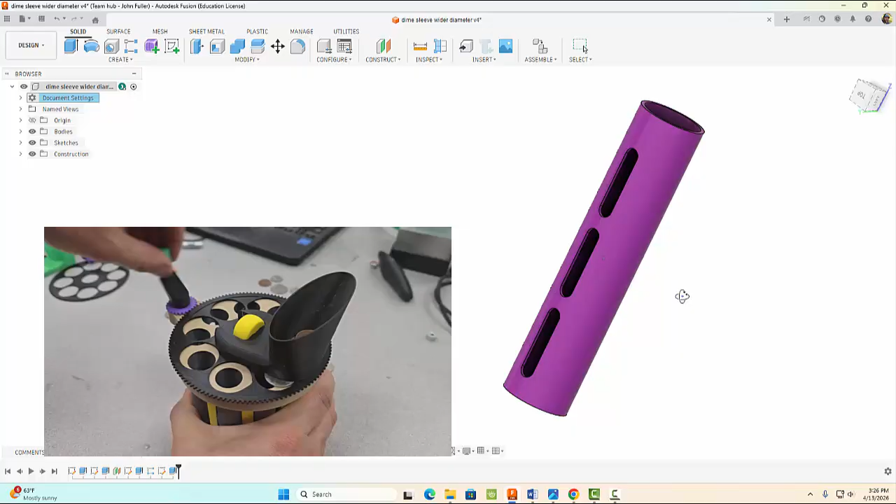Come on up to File and do a new Part Design and select Create New. The first one we're going to make is our dime coin sleeve. We're going to come on up here and create a sketch on this plane.

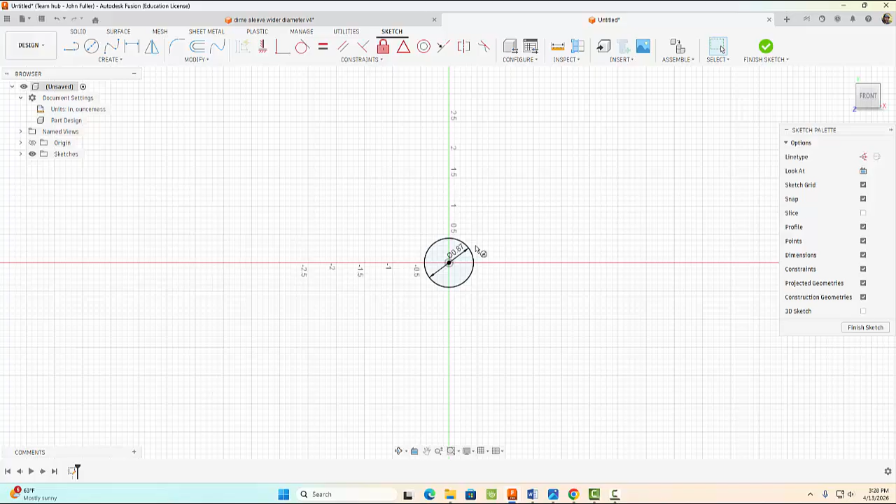Come on over to Center Circle, and we're going to drag out a circle with a diameter of 0.87 inches. That's it for this sketch. We're going to finish it and extrude it a distance of 0.05.

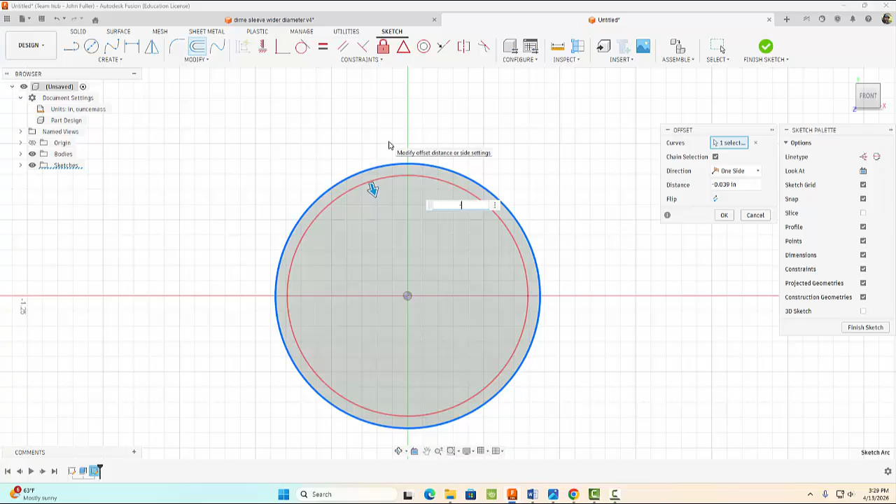Now let's create a sketch on this face, and we're going to project the outer circle. Hit OK, offset it a distance of minus 0.05, enter, and then that's it.

Finish the sketch, and we're going to extrude this outer profile a distance of 3.92 inches. Now we're going to do an offset plane from this guy right here, and drag it out 3/4 of an inch or so, 0.75.

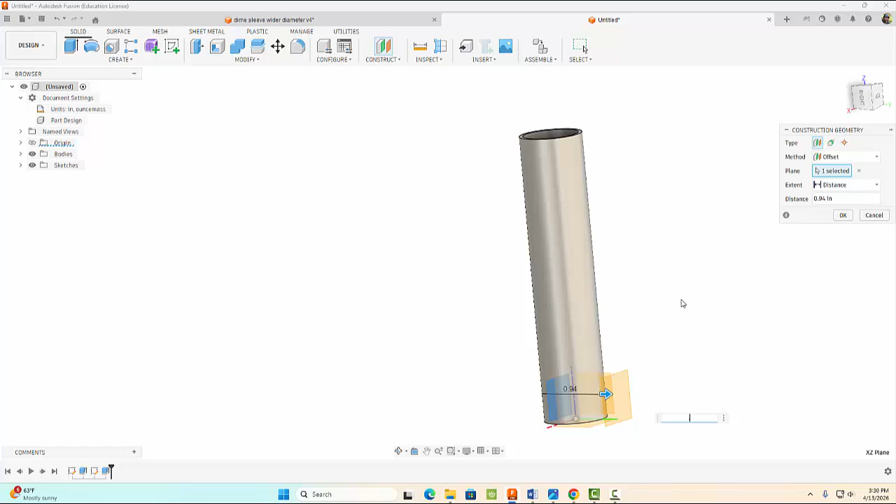That should give us enough room for all 3 or 4 of our coins that we're going to make. Let's go ahead and select OK. And as you probably guessed, we're now going to start a sketch on that plane right there.

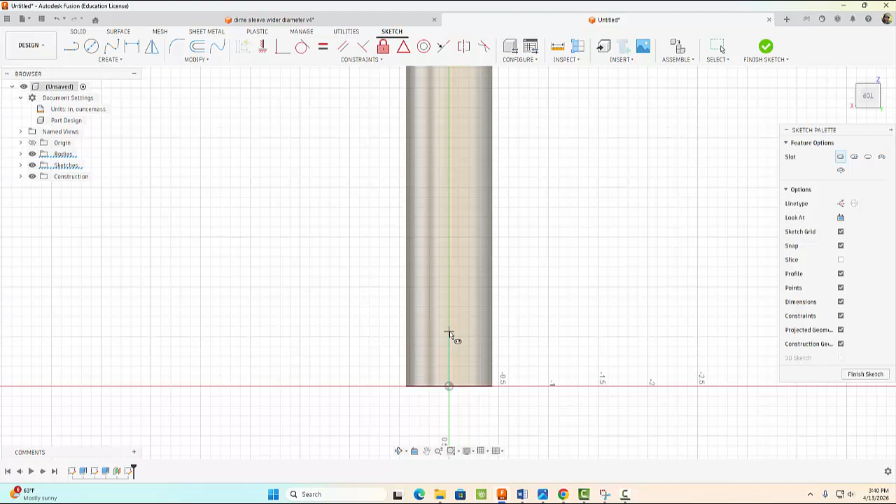Now let's come up to create, and we're going to do a slot, a center to center slot. I'm going to try to line it up with this middle origin point here, just click here, and create something like that.

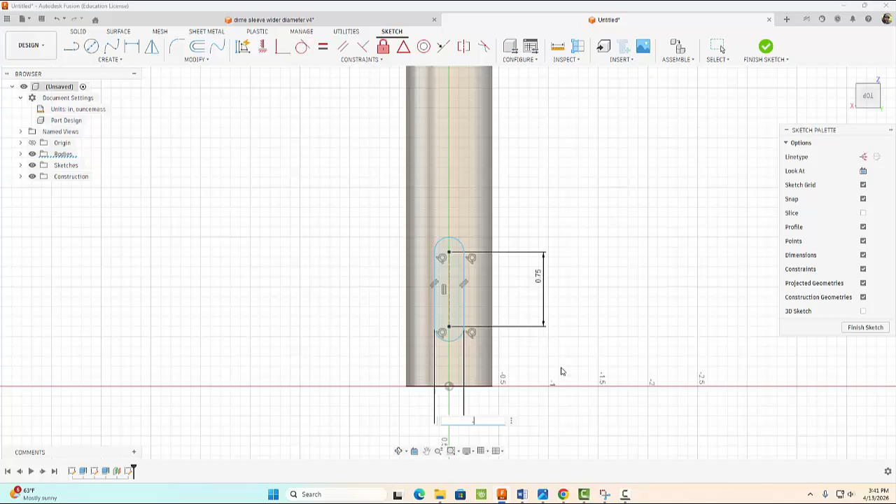Now let's add some dimensions. We want this distance to be 0.75, enter, and the width to be 0.2. As you can see, it's not centered, so to fix that, let's make this vertical with that. Now it is perfectly centered.

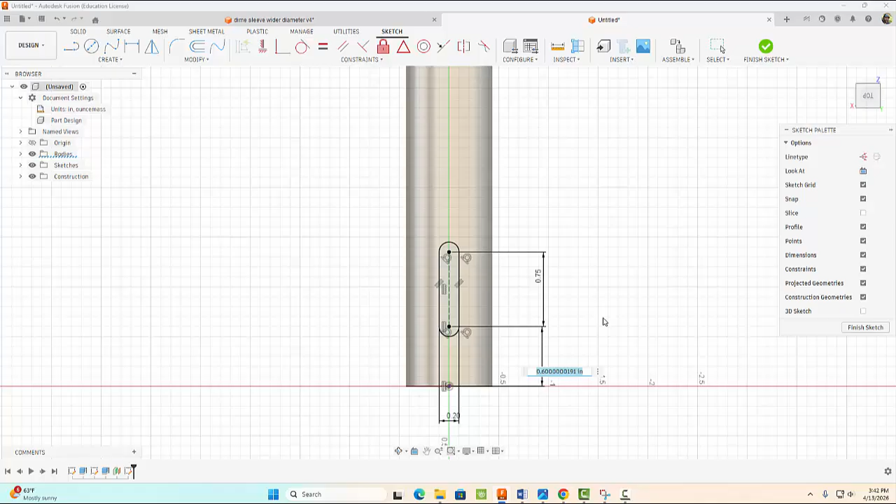And then we're going to come over here—I forgot we have to dimension it from this bottom point here, 3/8 of an inch or 0.375. Once that's done, we can finish our sketch.

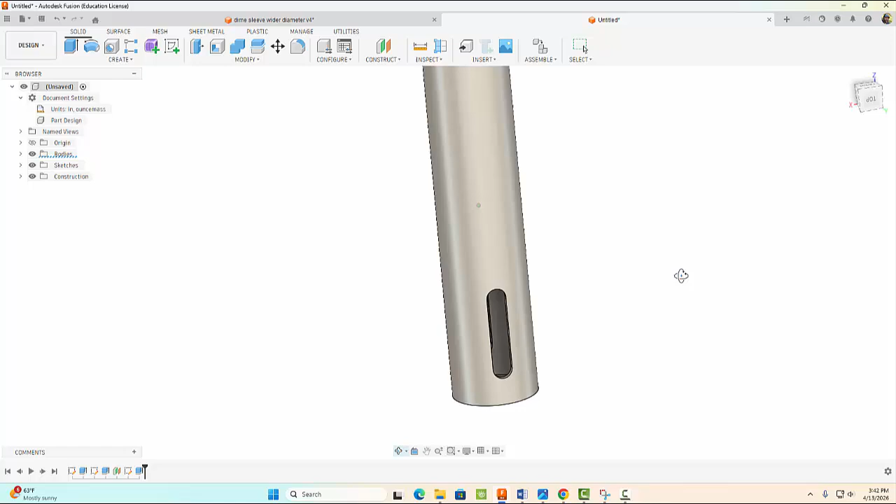We're going to extrude this out so it cuts through both sides a distance of 1.75 inches, and that'll do it for this feature. I'm going to turn the visibility off on that guy so you can't see it.

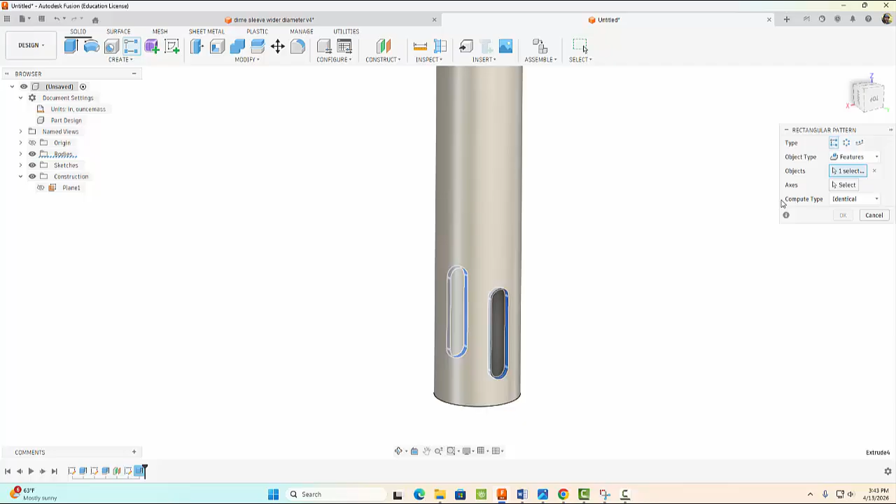Now we're going to make a pattern out of this, a rectangular pattern. So we're going to go to create pattern, do a rectangular pattern, and select this feature right there. For our axes, we got to come over here and select this center axis going up here, and we want to do 3 of them.

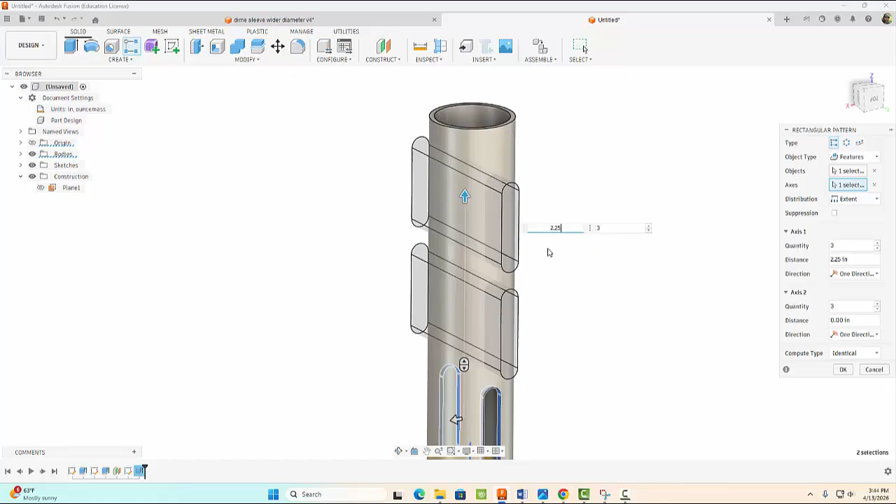I'm going to drag them up, and we want this to be 2.25. That looks good. Go ahead and select OK, and you should now have 3 of these slots.

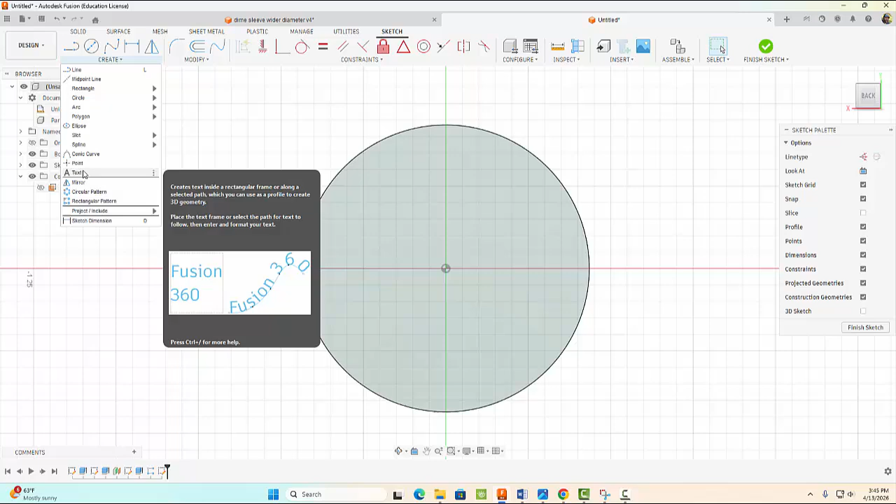Now on the bottom of our coin here, we're going to start a sketch on the bottom. I'm going to zoom in again so it's easier to see. Now we're going to come over to create with our text, and we're just going to drag out a square, something like that.

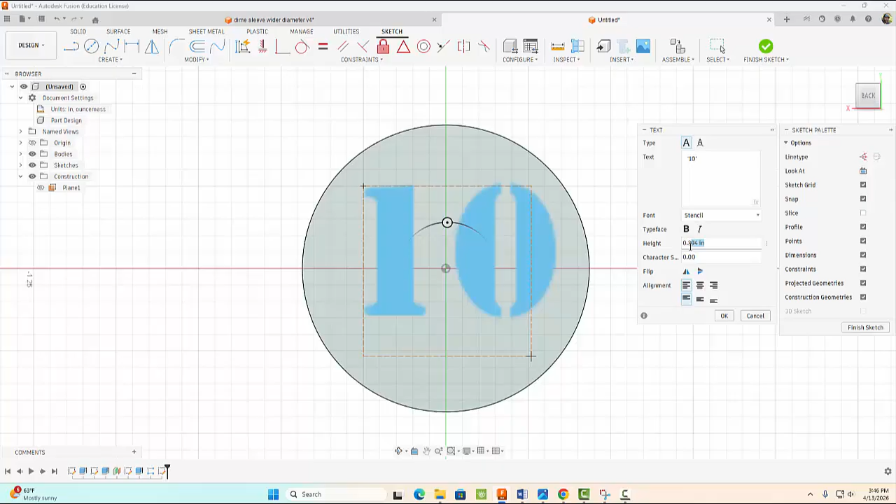I'm going to type in 10 for 10 cents, and find stencil right here. We're going to set the height now to 0.4, and we want to center it. Click that guy and then hit OK.

Now you'll notice it's not perfectly centered, and we can fix that with our dimensions. It's a little high, so if I adjust this dimension and make it shorter, I can bring it down. Let's just try 0.2—looks pretty good. Now it looks pretty centered from top to bottom, I should say.

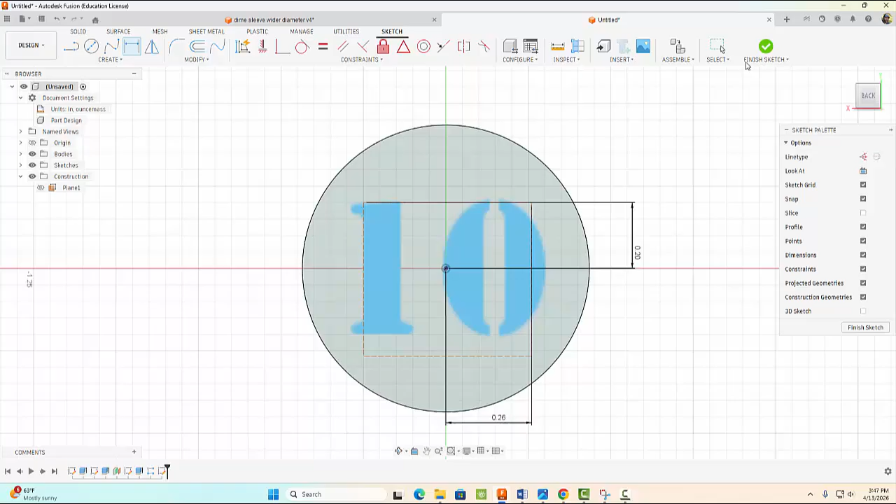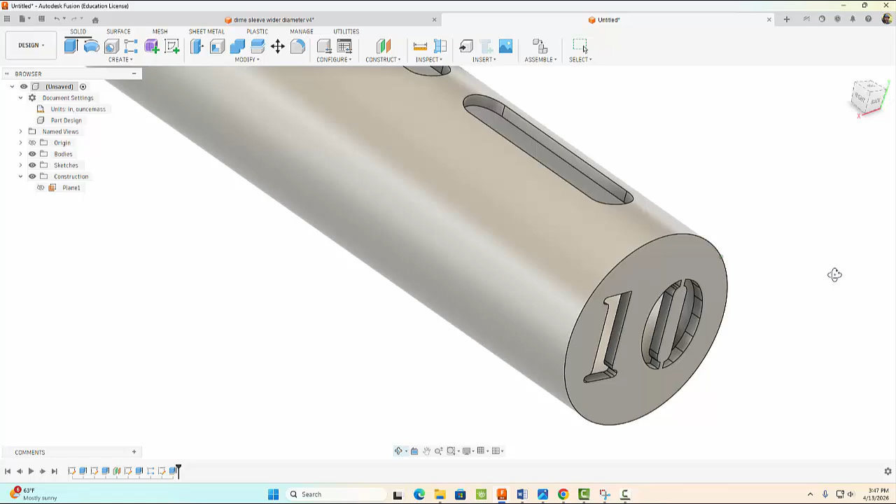We can maybe shrink that down to 0.26. All right, that looks pretty good. So when you're done and have it nice and centered, go ahead and finish it. And then we're going to extrude, not that profile, that one. Let's go a distance of 0.2 to make sure it goes all the way through. And there you go, there's your 10-cent sleeve.

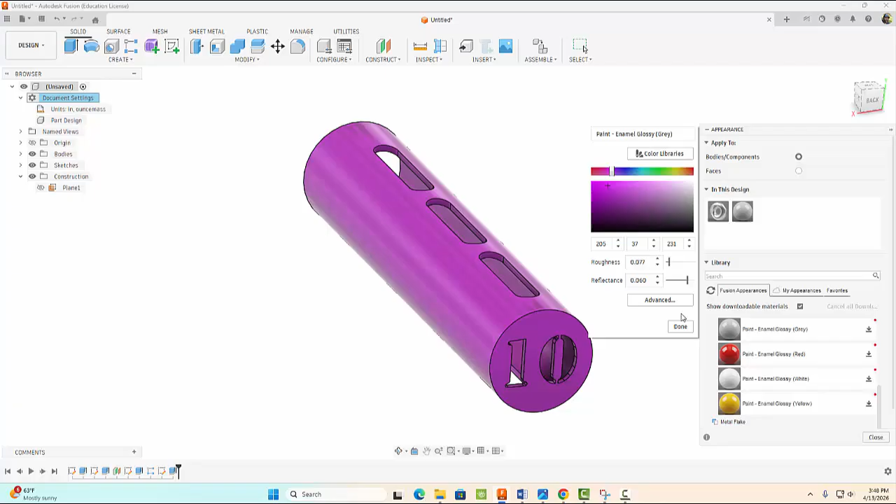All right, that'll do it for this part. However, we should give it a color here. So I'm going to come up here, right click, edit, and maybe do something I haven't done before. Maybe a cool purple. There we go, hit done. All right, make sure you save it now.

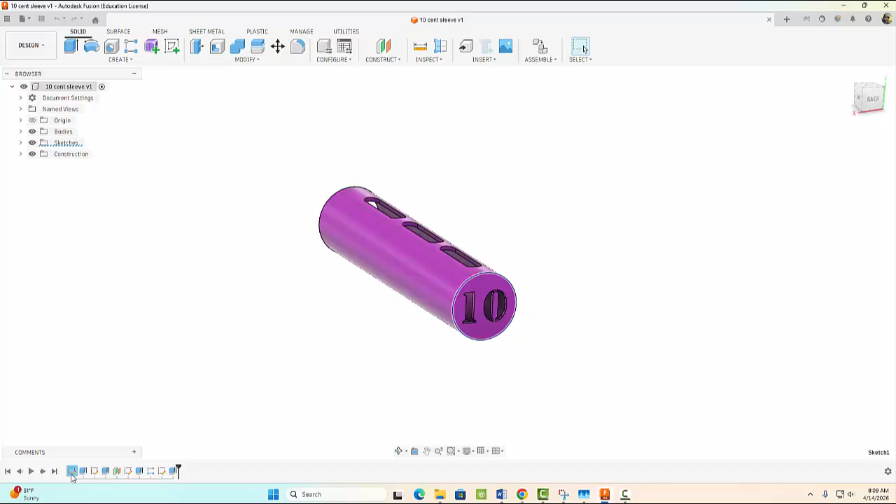10 cent sleeve, and hit save. All right, so now that we've made one here, we can go in and just make some changes to do our penny. For example, our penny has a slightly wider diameter, so we're going to come in here, edit sketch, and set that diameter to 0.93, enter, finish sketch.

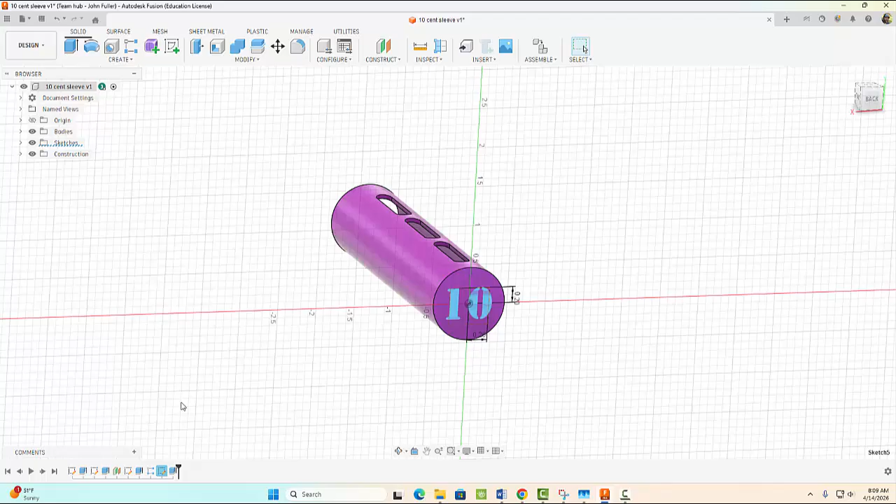All right, so our penny is pretty much done, except we need to change this to 1. So once again, come back into edit sketch. Let's double click on that blue, and we're just going to get rid of that 0. And there we go, hit OK. And then finish sketch. Our penny sleeve is done.

But we need to come up here and save it as something else, not a 10-cent sleeve. We need to save it as a 1-cent sleeve. All right, let's go ahead and save that.

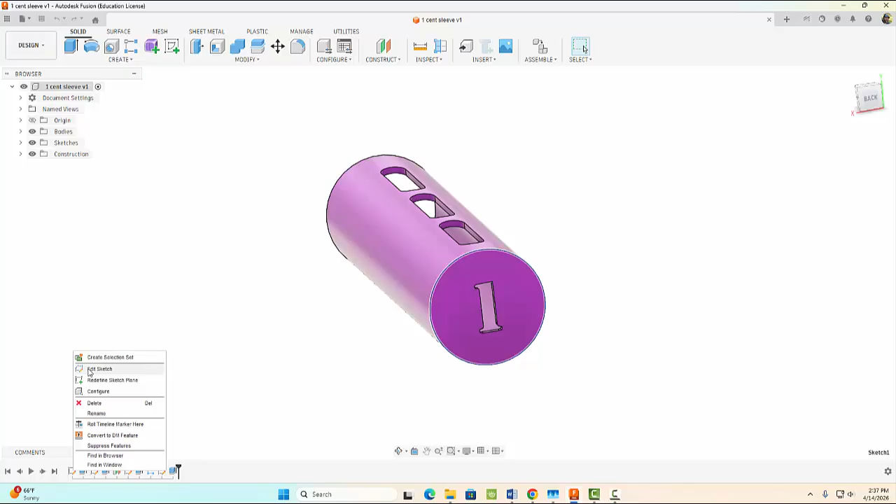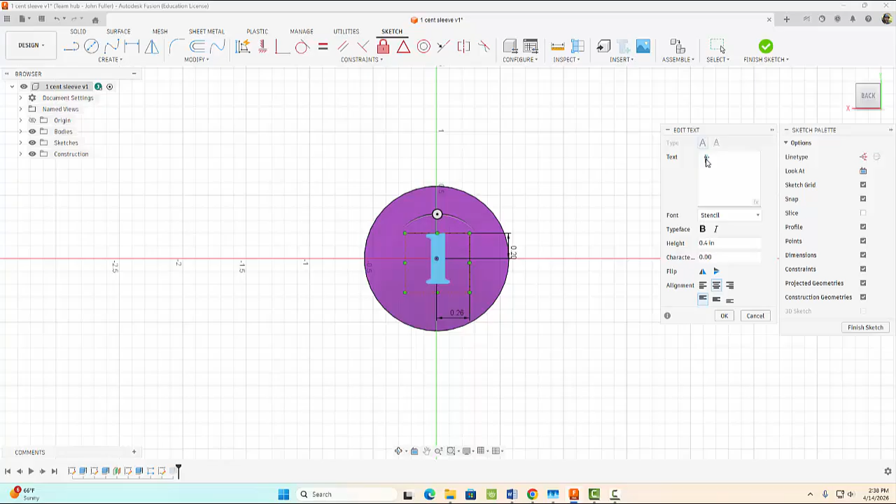Now let's repeat this process to make our quarter sleeve. So once again, we're going to come on over here, edit our sketch. And because quarters have a larger diameter, we're going to increase the size here to 1.14, enter. Okay, and we're going to finish our sketch, and then come over to this sketch, edit that sketch, double click on it, not on the dimension, and type in 25. Check to make sure it's centered and it looks pretty good, hit OK and finish sketch.

All right, and now we need to save this as something different. So we're going to save it now as 25-cent sleeve and hit save.

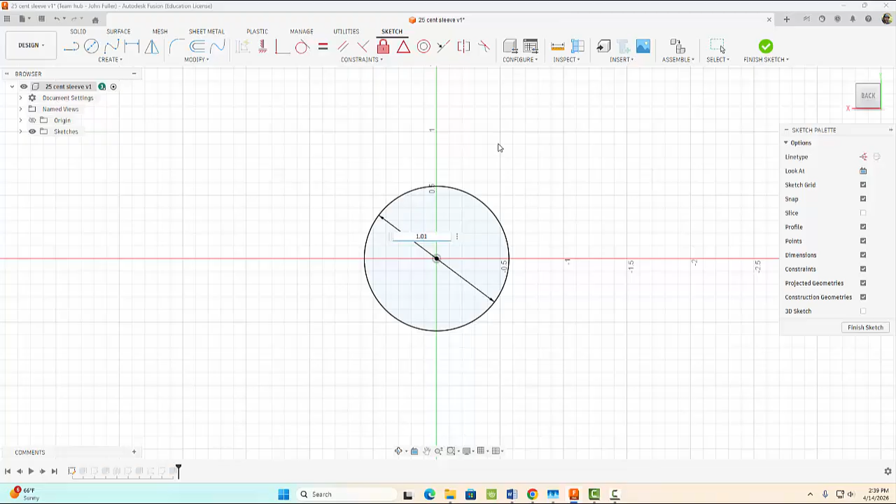And the last thing we need to do now is make our nickel sleeve. So that's easy, again we're going to repeat the same process. But nickels have a smaller diameter, so we're going to change this to 1.01 inches in diameter, finish our sketch.

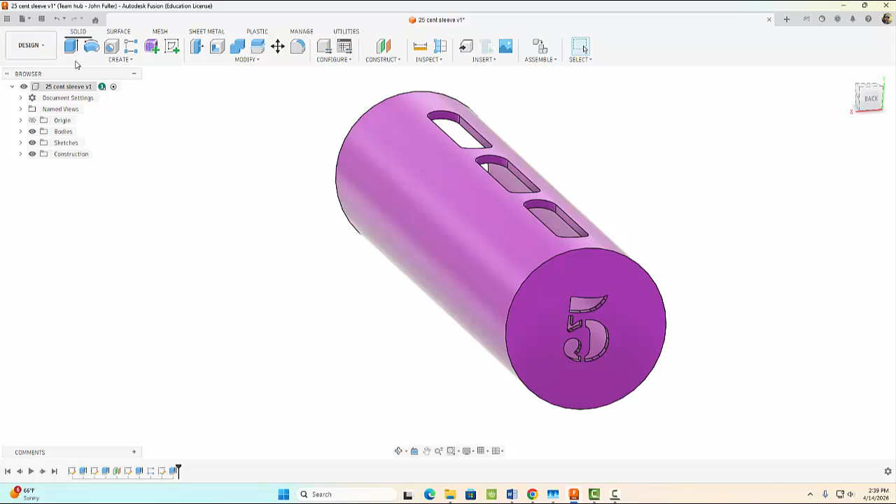And then we're going to come and edit this sketch, and double click on 25 here and just make that 5 for 5 cents, hit OK and finish our sketch. And once again, come on up here, save it as something else, and you probably guessed it, we're going to save it as 5-cent sleeve. All right, let's go ahead and select save.

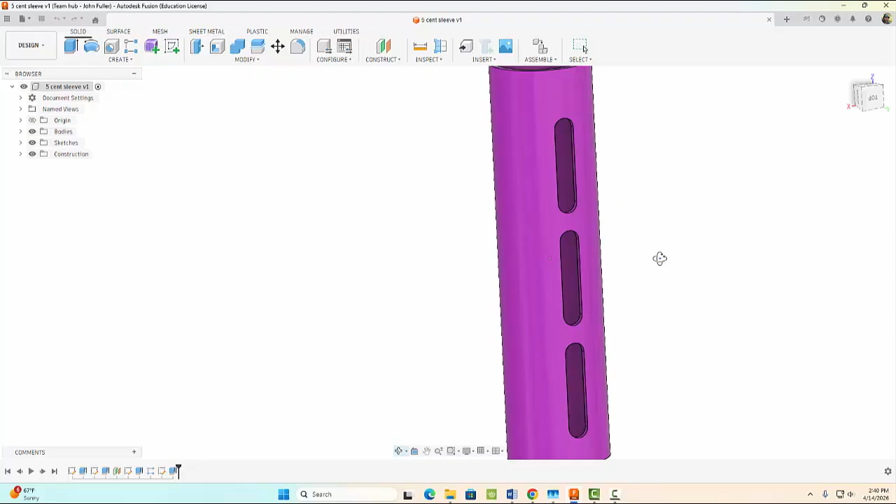All right, so once you've made your dime, penny, nickel, and quarter sleeves, you are done. One thing to note is when you 3D print them, you want to print them like this. And notice we don't need supports here because we have this arch. So it's worth noting that whenever you design parts, try to design them so you don't need supports.